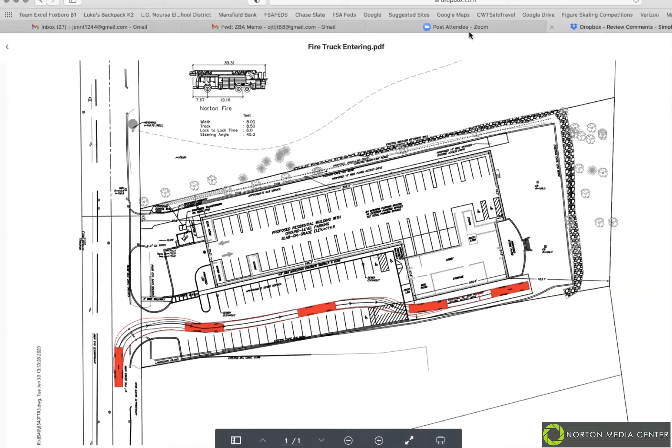Or somebody show it? Yeah, it was submitted with the revised site plans. Try now, can you see that? Yep, that's it. So this is the entrance, I believe. That, Tim, is that from recent? I don't remember looking at that. So it's under, hold on, it's in the Dropbox under application. If you go all the way down, you'll see them at the end. You got fire truck entering, fire truck exiting. I don't know the date on them. Well, I thought it was just done.

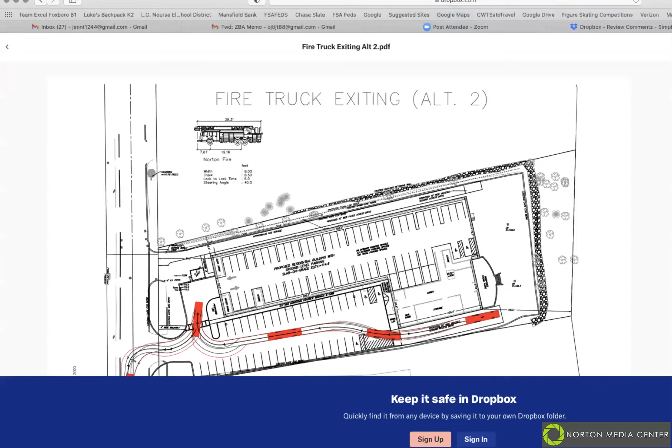That's why I'm asking, because I was looking for some recent posting. Yeah, that would be, they resubmitted that, or those came in pretty recently. That would be from August. Yeah, that would be the leaving. I don't know where the date is on here. That's the swept path analysis you're referring to, Mr. Brennan? That's correct.

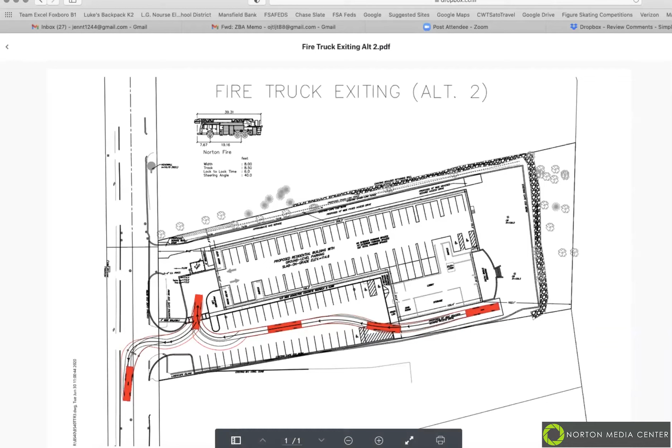Okay, anybody want to see the other one? Yes, please. Hold on, see how I can do this. I gotta move screens. Okay, yep, so the other path going to the rear of the building. I think what they're referring to is they used to be able to come around here, now come this way.

Well, why does this change that? Explain. The main reason for the change, I believe, is because there is pavement behind the building now that allows vehicular access 360 degrees around the building. Much of that paving out back is proposed to be removed due to conservation issues.

Is that the GeoGrid reference? So the GeoGrid, if you look at the plan on the screen right now, the two red rectangles you see all the way to the right, they start right after the hatching you see on the pavement there. So the pavement ends right at that hatching, and that rectangular box around those two red rectangles, those are the fire trucks. Around those two is the GeoGrid, which makes it so the soil is able to support the weight of the fire truck without rutting out.

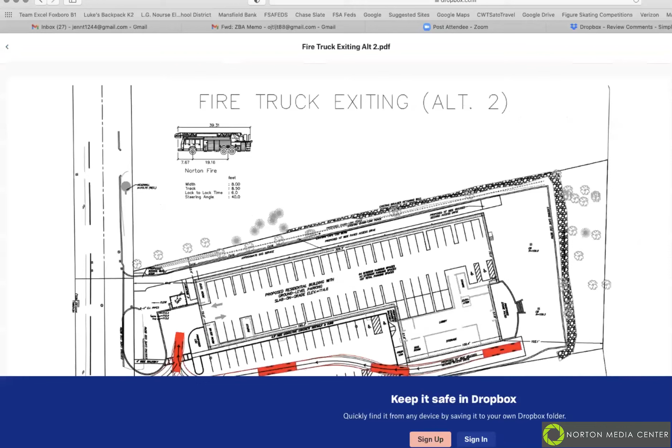I agree. I had a quick question. I think I'm reading this correctly, but looking at the first picture, that's how the fire trucks would enter. The second picture shows backing up. So if I'm understanding this correctly, the fire truck would come in, and if need be, would come all the way down to the right-hand side there where the geo area is, and then they would have to back out of that spot to get back out. Is that what it was saying?

Yeah. Yes. Okay, I guess I can't speak to that, but fire trucks are big trucks. I'm kind of curious what the fire department's opinion of that is.

Yeah, well, I don't disagree. I think we have to ask the fire department to come to the next meeting to talk to us a little about this, because his points are related to what we're talking about, but I'm not sure they're directly responsive to the points in the email from February 10.

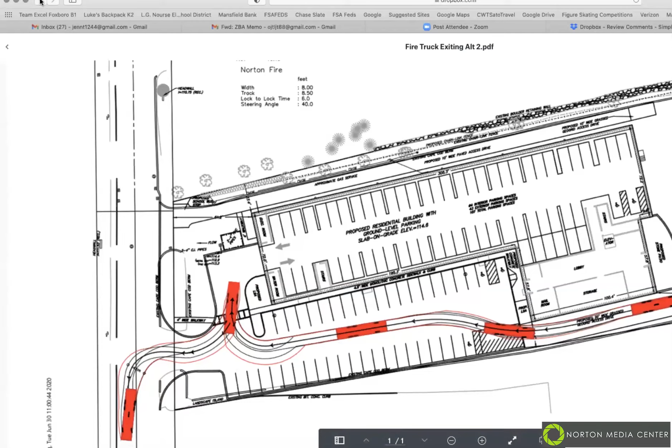Right, because I think he actually makes mention that he was under the impression he would be able to loop around the building, which obviously he cannot do right now. He referenced Deputy Chief Keen when he was reviewing this initially, that it's usually the goal of the fire department to have full access, as Pat mentioned. And there were discussions early on about them being able to take their truck on the north side, which is that 10-foot wide access point that's there now.

There were concerns about obstructions, about them getting over there, but typically they want to have full access if possible. And let's not forget too, this is a 4-story building, which is on the tall end in Norton too. So I can't speak to it, but I would think that access is even more critical here because of the height involved versus our typical 1 or 2 story buildings, for a ladder truck specifically.

Right, I'll ask Deputy Chief, I'll ask Jason to attend and see if he can be at the next meeting. Yeah, I'd like to explore that - I'd like to just ask him these questions and have him tell us personally, be able to answer some specific questions that come up like this. That would be helpful. Yeah, I think that'd be great.

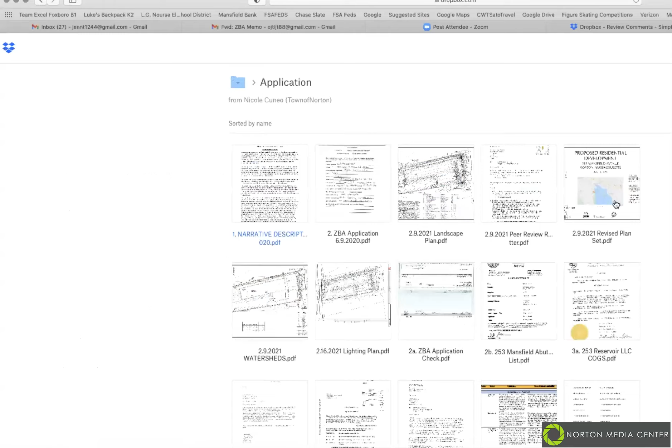But you wouldn't have the ability to get a fire truck back there to put a ladder up four stories to pull somebody out of a window. Yeah, I can't speak to it, but I just...

If I may, we submitted a set of drawings back in June that are the original drawings, quite different than the ones we're looking at now that were submitted in August. Those were generated off a conversation with the fire department through the summer, phone calls and the like. Maybe I misinterpreted what they were saying, but it was all about getting access to the back, not necessarily looping around with the truck. But I'll certainly touch base with the fire department and discuss access to the back of the property. I thought we had that kind of knuckled down, but certainly keep this concern open.

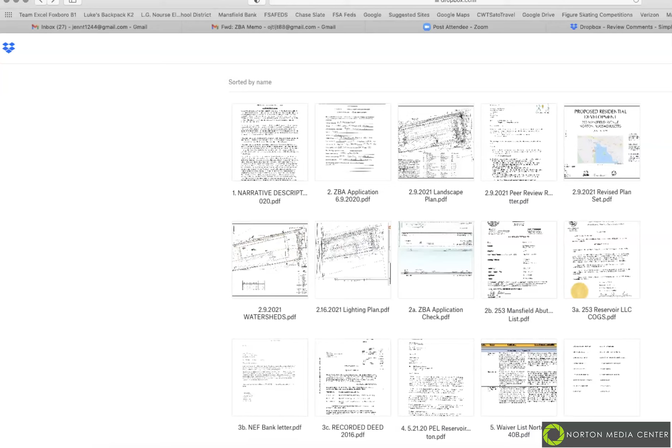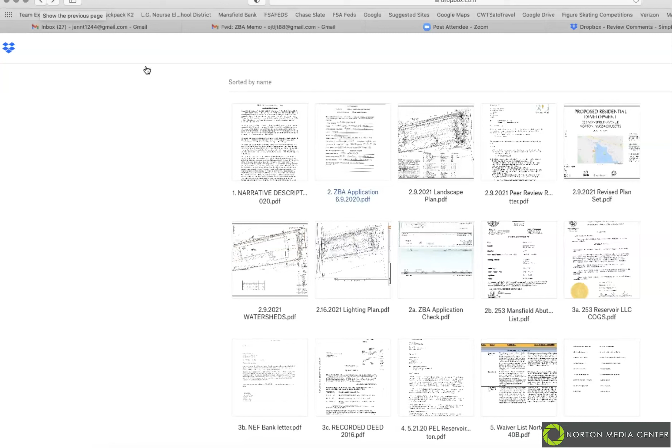Well, I appreciate that contact, because I don't remember what the original plan was or how this one's different, but I'll go back and look at that too. Is it this side right here? I don't know what we're looking at. I mean, I don't know. No, that's not it. No.

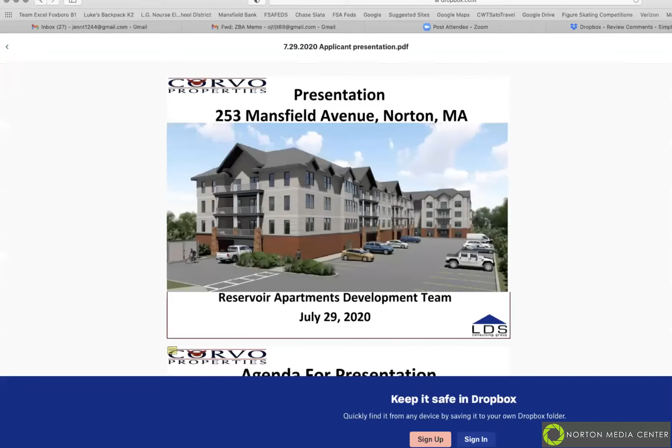So it sounds like we need to explore this at the next meeting. Yes, I think if you go to the one right next to it, that might have been it. This one? That one, yeah. June 29th, is there a revision date? No revision date, that's the original submission.

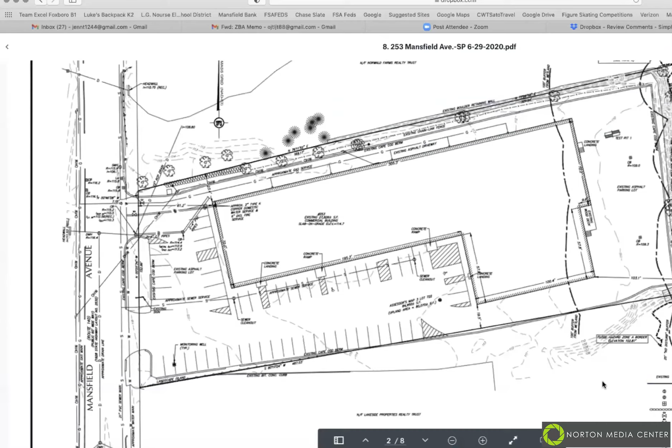Keep going, existing conditions. Keep going, although you go down another set, next. Oh, there we go. So we have the original, that's the original set. Okay, how is this significantly different?

I'm sorry, it's... They wanted to have access to that as far back as the corner of the building. Is it this right here, the bottom part? Nope, down the bottom. Yeah, that's where they wanted to get access to that point, because if I remember correctly, they were talking about, they would never pull the truck behind the building during a fire. That's as far back as they would go. And I believe that's what the comments were, Jim. Is that accurate? That's what I recall, yes. And that's why we came up with that Geo Grid, to get them as far back to each corner.

Okay. What about the north side, at the top of the image? Yes. Can a truck get around from Mansfield Ave to that side of the building? Yeah, that's going to be a road on that. Yes, they have access to that as well. Oh, is that the emergency exit? That's correct. Emergency entrance, and exit, need be.

Sorry, I didn't hear that. And egress, I mean, there were discussions about smaller trucks, an emergency ambulance picking up somebody off the shore of the reservoir, being able to loop around, drive across and exit on the north side. There were discussions on that as well.

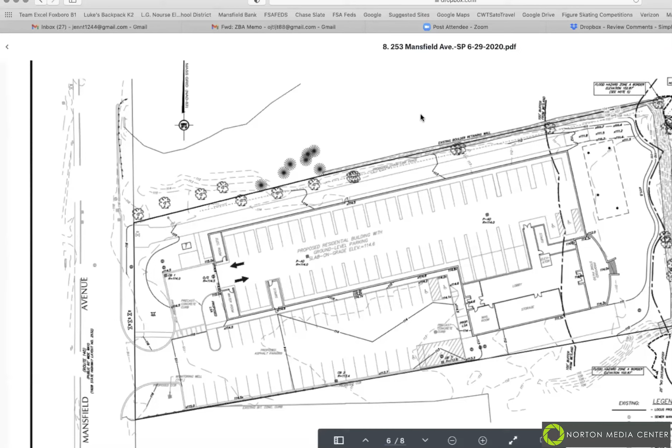Okay, thanks. If we could continue now with Mr. Brennan's points here, though, let's try to get through these, at some level.

The next comment, number 5, was also about the emergency access on the north side of the building. So I think we can wait for the fire department on that one. Numbers 6 and 7, they've addressed.

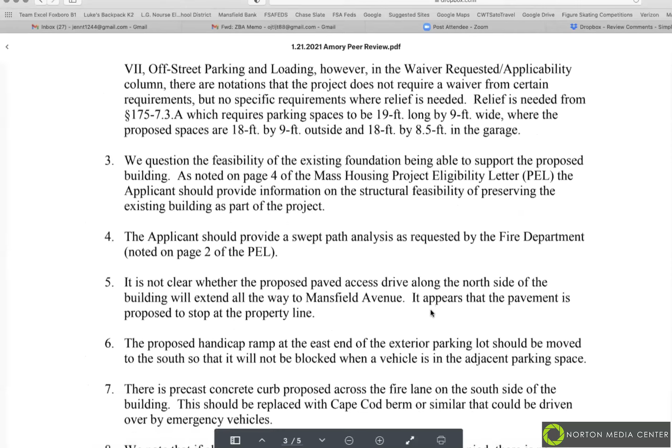Number 8, the only reason why I brought that up was if all of the garage spaces are occupied, there's no way for a vehicle to turn around that enters the garage. Their response was that it's going to be professionally managed and all the spaces will be assigned. So I guess if the board's okay with that, that's fine.

A vehicle can't do a 3, 5, or 7 point turn in the garage? It would be tight. It's only a 24-foot wide aisle, so it's like your typical shopping center. If you went down a row in a shopping center and there's no way to turn around at the end, trying to turn around between the two rows of cars is rather difficult. Oh, okay.

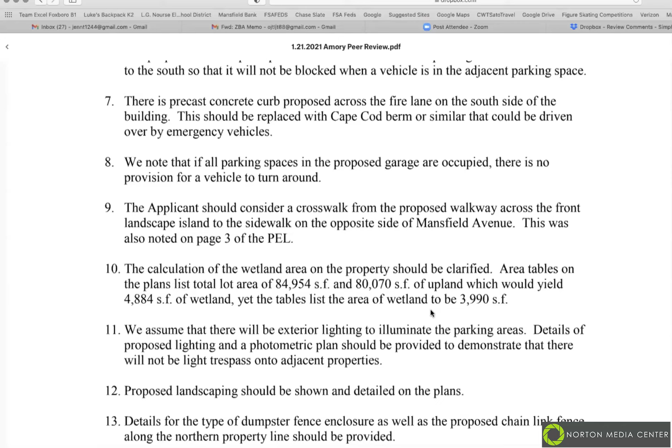There's no way to remedy that under these plans, is there? The only way would be to lose a space somewhere that you could turn around in, even a double space marked off with yellow paint. Okay, well, something to think about.

My next comment was about the crosswalk, which Mr. Dirk had gone into already. The reason I brought that up was mainly it was in the project eligibility letter from Mass Housing that they had suggested looking into a crosswalk too, so I was just reiterating their comment there. Okay, that's still open. Go ahead.

The next one, number 10, was addressed. Number 11 was the lighting, and they have since submitted a lighting plan, I think it came in either yesterday or this morning. Has that been reviewed? I looked at it quickly. I think my only comment on it was that in the middle they show a couple of lights that appear to be basically right down the wall of the building, but they're shown inside and out and at 25-foot height. So I don't think that plan is really showing the lighting inside the garage at all. It's basically assuming that it's a wide open parking area from the looks of it. I didn't look at it in detail, but the way that plan looks, it's just a little strange.

Can you try to clarify for the next one? Yeah, I can. I will do that. I don't mean to put it on you. I mean you and the... No, that's fine.

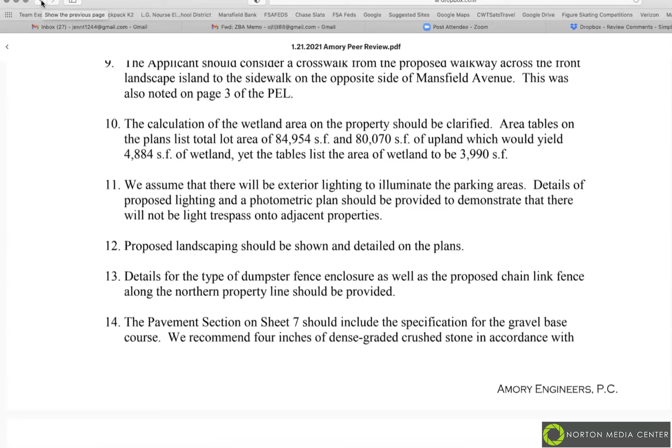Number 12 is all set. Could I ask a question on that? Could I back up? So you want a lighting plan for inside the garage? I thought the purpose was for the exterior. No, it is for the exterior, but they're showing the lights. It's a double fixture. I can actually, I don't know if I can share a screen, but I actually have it here. Yeah, I'll stop mine. Okay.

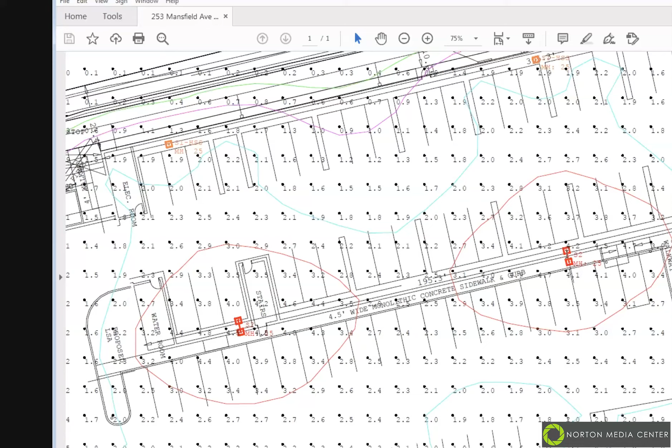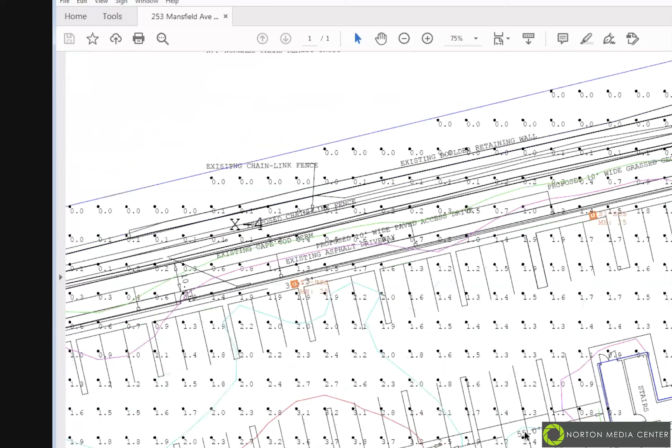There you go. So if you see, everybody see that? I do. I see it's illuminating and it's showing the illumination inside the garage. Yeah, so this is a double. Looks like a double-headed fixture, and that wouldn't be the way it is. It looks like they did this based on no garage being there. Looking around the perimeter, it looks like it's okay. You're not going to get, especially on the residential property on the north side, you're not going to get any noticeable light spillover. There's a little bit on the south side, but that's next to the commercial building up here. So your comment is just that doesn't seem to make sense with what they're showing here. I get you. Yeah, we'll have that fixed for you. Okay, sorry about that. Yeah, no problem, I just... okay.

Go ahead. The next one, they submitted a landscaping plan. I haven't reviewed that in detail, but it looks like a pretty robust landscaping plan that the board should take a look at some point. Is that, you're in line to do that, correct? I can look at it. I'm not a landscape architect, but I can certainly take a look at and make some comments on it. But again, it looked like a fairly robust landscaping plan that they had. Okay.

Number 13? Yep, they didn't provide details, but they did specify that the chain link fence along the northern property line is supposed to have slats, and the dumpster shall have a solid fence enclosure. And that's just for screening. Both the chain link fences along the northern property line, that's the abutter on the north side, and then the dumpster enclosure, obviously you want that hidden from sight, and it's on the front side of the building, so I think they would want it hidden from sight as well. Right.

The next, number 14, is some gravel specs, which I just think that they forgot to add those to the plan. Not a big deal. Okay.